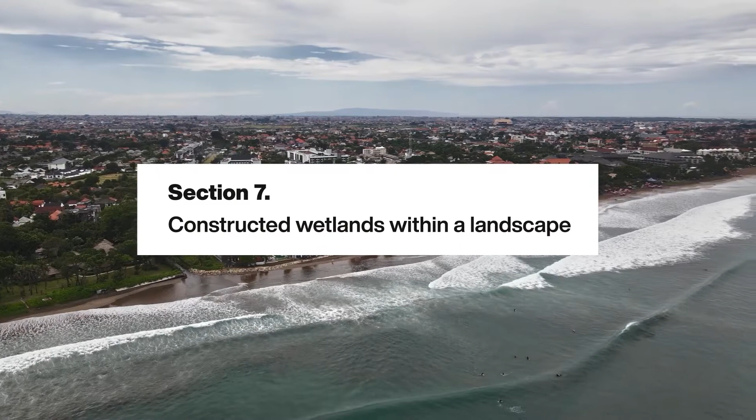So, where did we stop yesterday? Methods of wastewater collection. The first one is conventional, the second is a correct one. Well done, Betsy. That's the best way to say it. Thank you, Professor. Now please come out to the board and tell me what that means.

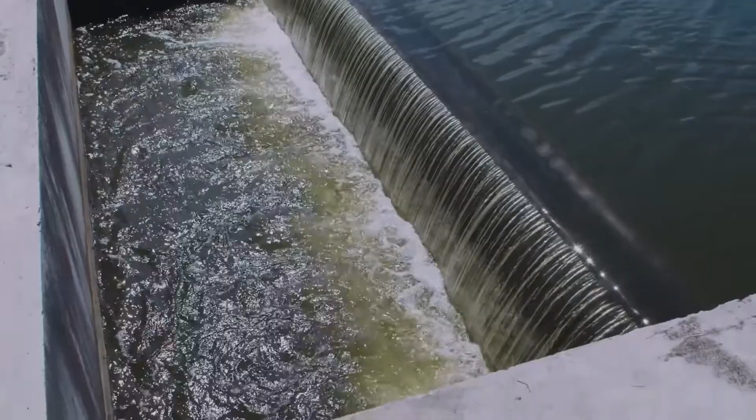With pleasure, Professor Higgins. The conventional method of wastewater collection dates back to ancient times, when wastewater was not cleaned or treated. Wastewater was just discharged and forgotten. This practice is still common today, where wastewater naturally flows downslope, ending up in the first body of water it runs into. It is interesting to note that today the types of wastewater, regardless of their principles of formation, are not the same as they were centuries ago.

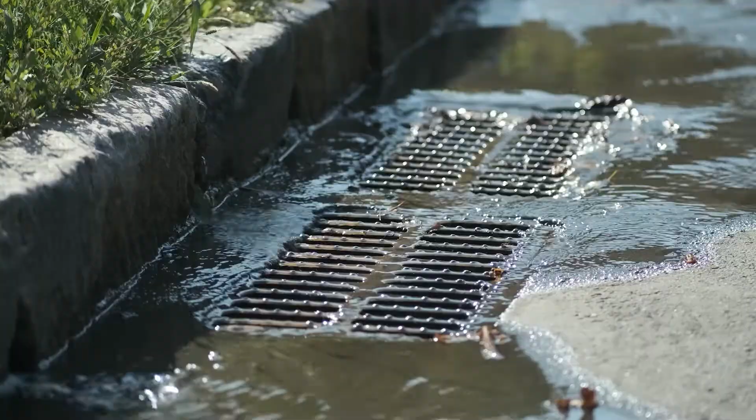Let's describe them. Domestic wastewaters carry everything related to human life: feces, urine, pharmaceuticals, detergents, and other household chemicals. Stormwater runoff resulting from precipitation that washes man-made pollutants off of roads, urban and industrial areas.

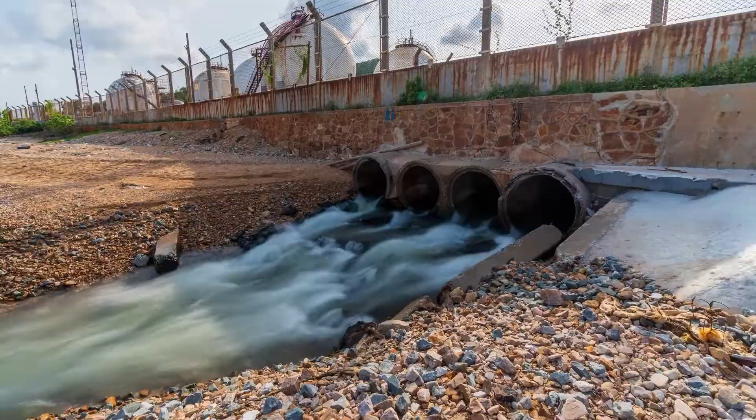There are two types of agricultural wastewaters: wastewater produced by plant cultivation and wastewater generated by livestock production. The first contain organic fertilizers, mineral fertilizers, and crop protection agents. The second contains waste from animal and poultry farms. And finally, industrial wastewaters, which are often the most toxic.

I'd like to reiterate that the conventional method of wastewater collection simply means that wastewater was not collected. Roughly speaking, various wastewaters simply flowed into random points of discharge and bodies of water. The second principle of wastewater collection includes three technological approaches.

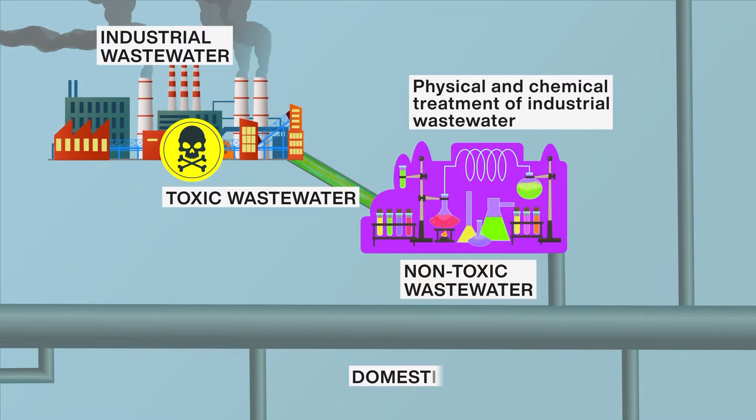The first approach: diffused runoffs are united into one water channel flowing into a particular treatment facility. The second approach: toxic runoffs are united into one channel going into a specialized treatment facility. The third approach deals with domestic wastewaters. Since they can be slightly polluted or heavily polluted, they require different types of constructed wetlands.

Slightly polluted domestic wastewaters are better treated by surface flow wetlands, and heavily polluted domestic wastewaters are treated by subsurface flow wetlands or hybrid wetlands. All of these methods help to collect wastewater suitable for biological treatment. Thank you, Betsy. You haven't missed anything.

Now, may I ask you to solve a problem? 500 tourists, including staff, are staying in a big oceanfront hotel. Every day, 600 cubic meters of the hotel's wastewater is released into the ocean. The hotel is served by a subsurface flow constructed wetland. The constructed wetland has the following parameters. Hydraulic retention time is 5 days. The porosity of the substrate is 50%.

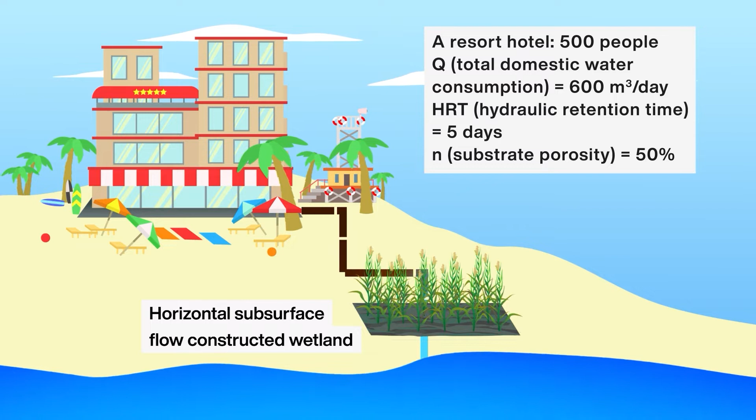I'd like you to calculate the working volume of this constructed wetland, necessary for more effective treatment of domestic wastewater that enter the ocean. Is the task clear? Yes, it is. I just need a few minutes.

The working volume of the constructed wetland is calculated using the following formula. Daily water flow rate is multiplied by hydraulic retention time and multiplied by 100%. The obtained product is divided by porosity, expressed as percentage. If I haven't made any mistakes, a volume of 6,000 cubic meters is required for effective treatment of this domestic wastewater.

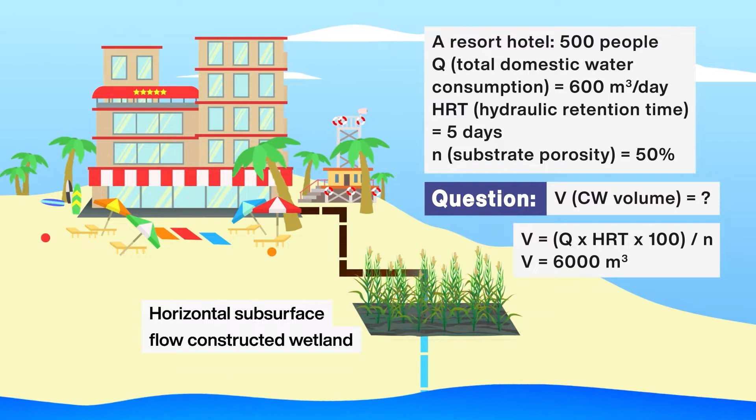Your calculations are correct, Ms. Doolittle. However, I set a trap that you have fallen into. If you have divided the overall water flow rate, 600 cubic meters per day, by the number of tourists, 500 people, you would obtain that each tourist spent about 1,200 liters per day. That is more than 4 times as much as the standard consumption rate in developed countries.

Thus, it's apparent for us that the influent is highly diluted. Maybe because of irrigation runoffs, or water from swimming pools, or both. Anyway, the optimal working volume of the wetland for this particular hotel compared to your calculations should be? It should be 4 times smaller than my result. That's not 6,000 cubic meters, but just about 1,500 cubic meters.

How stupid of me. You shouldn't criticize yourself, Miss Doolittle. Let's get into our subject.

Okay. Betsy, why did we choose this name for the subject? Constructed wetland within a landscape. What do we want to point out by choosing these words? Firstly, wetland construction and design is always part of a landscape. Secondly, constructed wetlands ensure a smooth transition from an artificial landscape to a natural one.

And thirdly, unlike activated sludge systems, constructed wetlands do not require a sanitary protection zone, which separates them from residential areas. That's not all. Autochthonous biocenosis of constructed wetland kills pathogenic microorganisms but doesn't harm beneficial microorganisms, which contribute to the treatment. Moreover, these beneficial microorganisms, together with the treated water, end up in natural bodies of water, where they continue cleaning. Thus, a constructed wetland is not only a piece of landscape, but also a part of the local ecosystem.

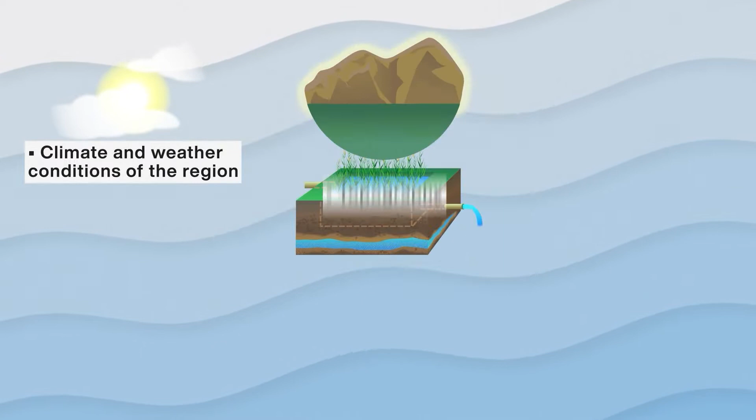To design a constructed wetland, technical engineers take the following factors into account: the climate and weather conditions of the region, the topography, the depth of the water table, the location of man-made objects nearby, the number of residents determining the wastewater volume, and the hydroecological characteristics of the receiving body of water.

Nowadays, there are many engineering solutions to each of the above-mentioned factors. Let me give some examples. Seasonal and weather factors involve, firstly, the planning of emergency spillways for excess water during heavy rainfall. Secondly, some protection to reduce evaporation from constructed wetland during dry season.

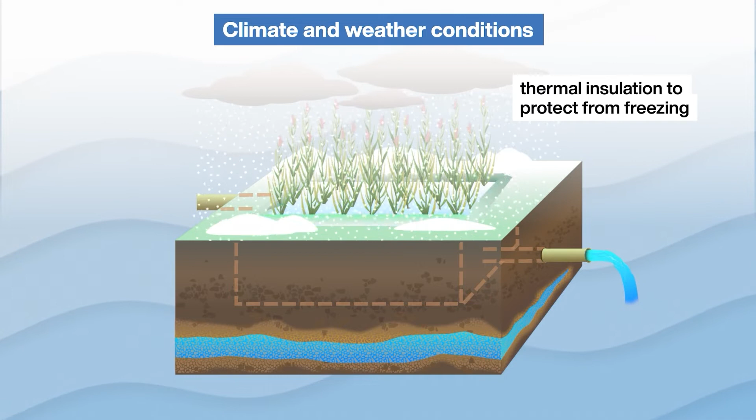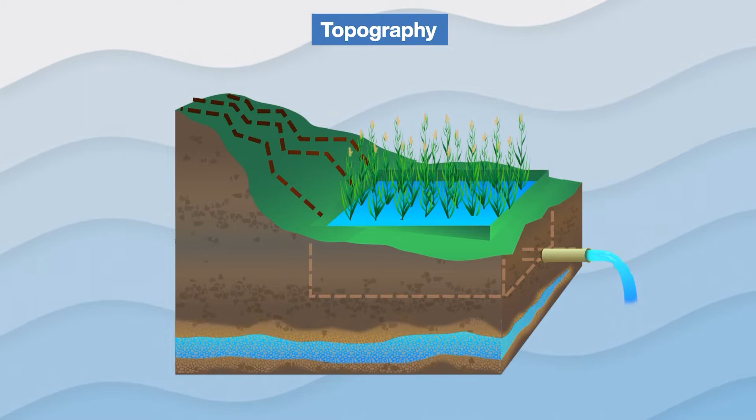And third, thermal insulation to protect the constructed wetland from freezing in case of a sudden drop in air temperature. The design of constructed wetlands requires considering the topography to ensure a downward flow for both influent and effluent in order to move water downhill. Betsy, why downhill? So as to avoid using pumps. Pumps would considerably increase the cost of constructed wetland operation and maintenance.

Exactly. The decision to build the constructed wetland below or above ground surface depends on the depth of the water table. If the water table is at sufficient, precisely calculated depth, the constructed wetland is built below ground surface. And vice versa, if ground waters are too high, a wetland should be located above the surface. Thank you, Ms. Doolittle. Man-made structures built into the landscape, like what structures, Betsy? Motorways or, for example, solid waste landfills.

Absolutely right. Stormwater runoff flowing down the motorways requires immediate treatment. That's why a very long wetland, often many kilometers long, is sometimes constructed on either side of a busy road. These constructed wetlands effectively treat stormwater runoff to prevent pollution of the nearby landscape. Solid waste landfills are exposed to heavy rainfall. In this case, a constructed wetland surface should be located below the waterproof bottom lining of the landfill.

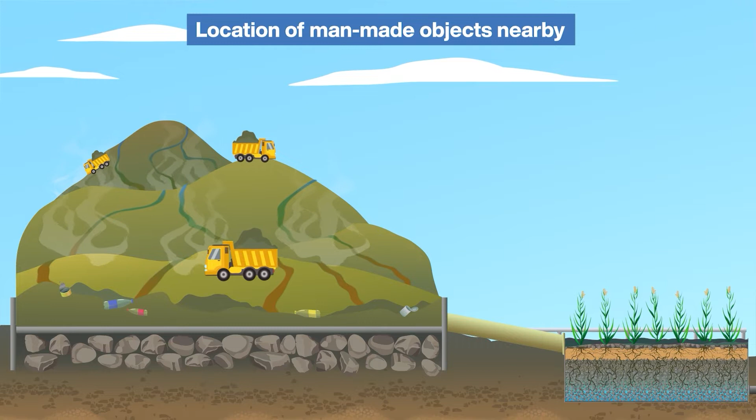Betsy, why do we need a waterproof bottom lining? And why does a wetland surface have to be below it? When rainwater percolates the layers of waste, the outflow is a toxic mixture. A waterproof bottom lining is crucial to prevent the infiltration of this toxic mixture into groundwater. And if the wetland is placed below the surface of the waterproof bottom lining, the landfill runoffs inevitably get into the wetland. Okay, let's carry on.

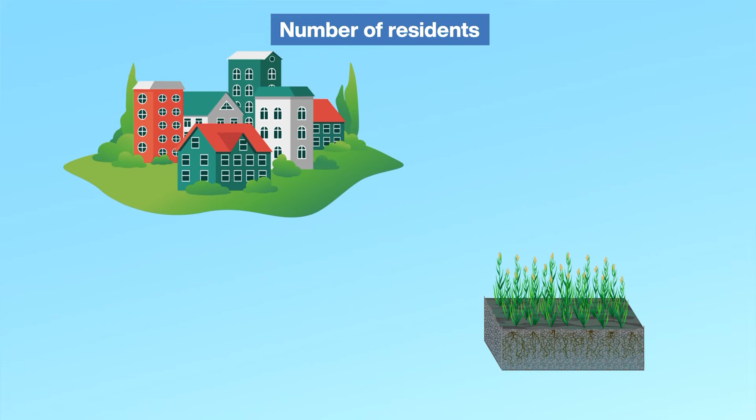The volume of domestic wastewater in this area depends on the number of its residents. And, as we have already discussed, this determines the working volume of the constructed wetlands suitable for this landscape. And then, lastly, self-purification of the receiving bodies of water, lakes, ponds, rivers, takes a short time only if we, wastewater treatment specialists, strictly follow certain hydrological, hydrochemical, and hydrobiological conditions. Project engineers consider most of these conditions when constructing the wetland.

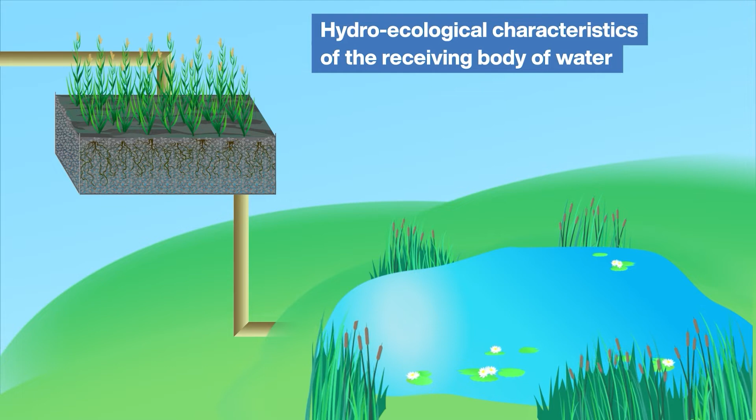Ms. Doolittle, thank you once again for your clear-cut answers and comments. I have no more questions. Professor, but may I ask you a question? Of course. Sir, could you give some examples of when effluents increase the biodiversity of a receiving body of water and improve its hydrological parameters at the same time?

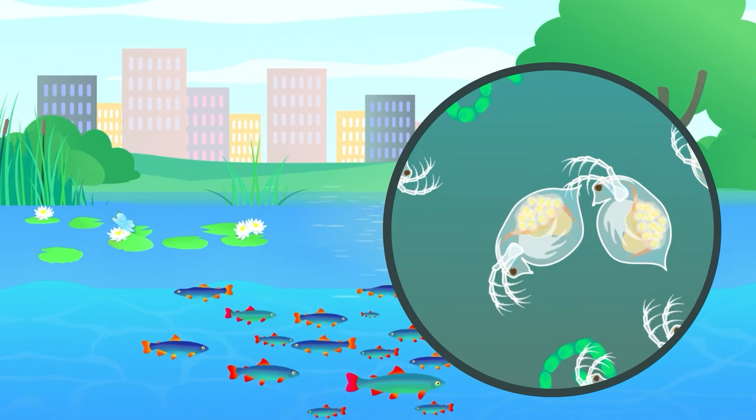There are many such examples, but now I will give you only one. The building of two integrated constructed wetlands at Xinhai and Daniaopi in Taiwan allowed for a considerable increase in biodiversity in the area. The number of bird, fish, and aquatic invertebrate species increased more than twofold. The landscape around these wetlands is now difficult to distinguish from a natural one. That's amazing. I agree. What's also amazing is how different constructed wetlands are from activated sludge systems.

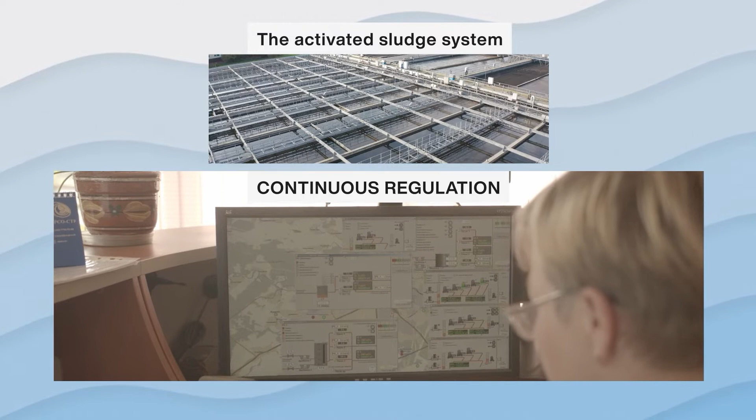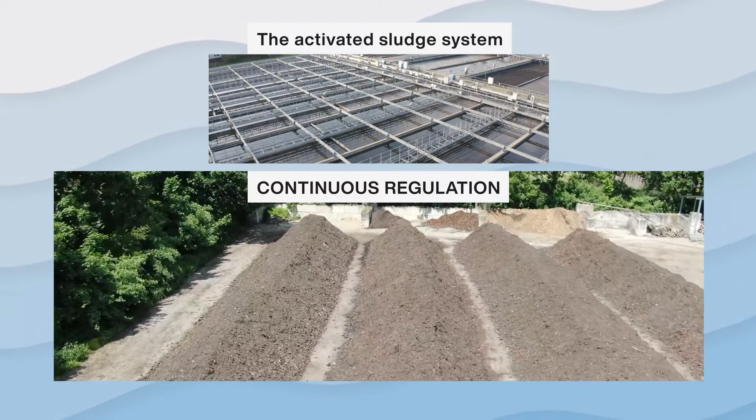I will reiterate that the cement facilities of an activated sludge system also need continuous monitoring. 24 hours a day, operators regulate the processes in the aeration tanks. Engineers must constantly monitor the air blowers and mixers. Special technical services continuously oversee the recycling of the excess activated sludge, etc., etc. A constructed wetland, by contrast, is self-regulated. It's amazing how a constructed wetland is in itself a small ecosystem, which incorporates into the ecosystem of a particular area and supports its homeostasis.

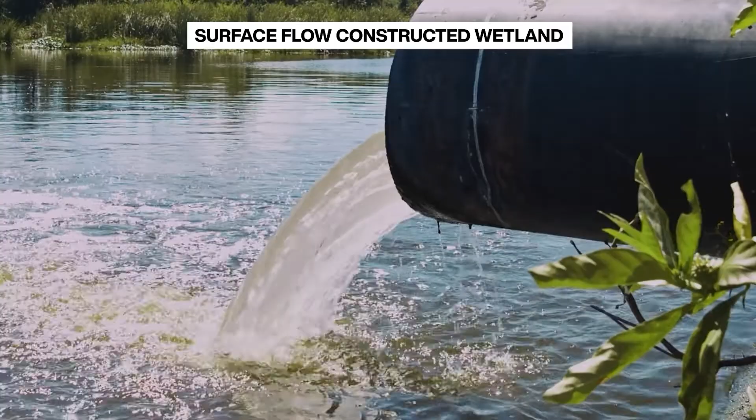For example, by discharging into a pond or lake, a constructed wetland can considerably contribute to plankton growth, which creates perfect conditions for populating the water body with fish. In addition, a carefully landscaped wetland is a comfortable habitat for aquatic and terrestrial animals, as well as many bird species, including migratory ones. On top of that, treated effluents can provide fast-growing trees with nutrients, as they consume far more nutrients than ordinary trees. All in all, it's hard to exaggerate the benefits of a constructed wetland as a treatment facility.

What's also important for us as wastewater treatment specialists is that constructed wetlands are usually very beautiful. They are visually attractive and make you feel as if you are walking in a park. That's true. Miss Doolittle, speaking of which, let's compare two quantitative indicators. A farmland of 1,800 square meters is required to feed one human resident of our planet on a daily basis, according to the Food and Agriculture Organization of the United Nations. This is the first indicator.

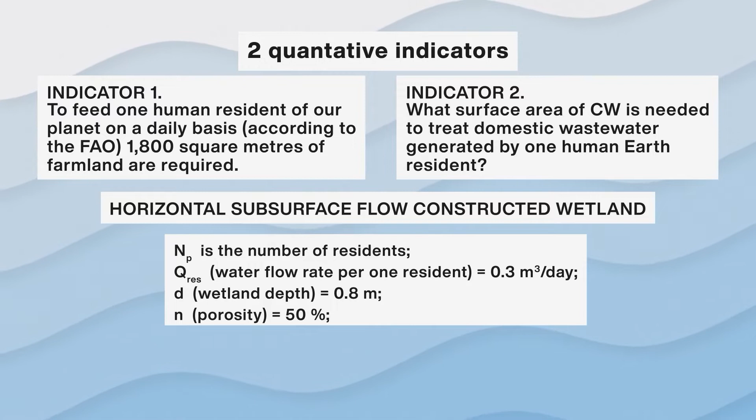The second indicator is for you to calculate what surface area of constructed wetland is needed to treat domestic wastewater generated by one Earth resident. Using which type of constructed wetland? A horizontal subsurface flow constructed wetland. Could you please write the following on the board? The number of residents whose domestic wastewater enters the constructed wetland equals Np. Water flow rate per one resident is 0.3 cubic meters per day. The constructed wetland's depth is 0.8 meters. Substrate porosity is 50%. Hydraulic retention time is 7 days.

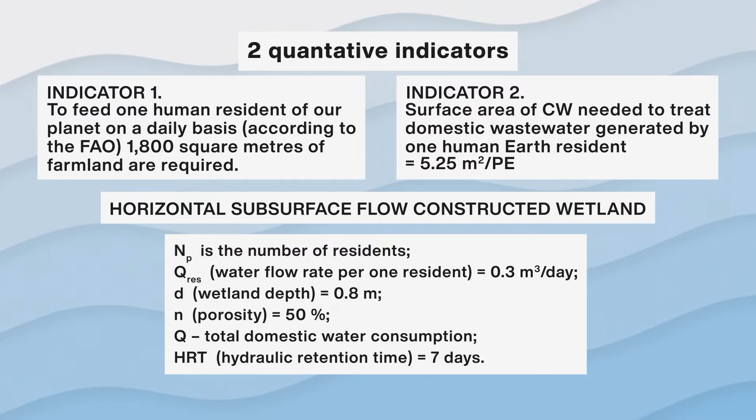Please calculate the surface area of the constructed wetland which can treat domestic wastewater produced by one person. Is the task clear? Yes, one moment, I'm making calculations. I have the answer. It's 5.25 square meters. I've never given much thought to how much more difficult it is to feed a human rather than to treat their personal domestic waste. Yes, but only if it deals with domestic wastewater, putting aside industrial and other types of pollutants.

Now I think it's time to discuss the most important feature of treatment wetlands. Please write on the board technical and natural components in wetlands construction. Professor, here we have to consider how important the work is that's done by engineers and the contribution of biologists in wetland construction. What's the role of engineers? Yes, it's an interesting topic. Engineers calculate a wetland's volume, choose the appropriate materials, and build the skeleton of a wetland.

Excellent, Miss Doolittle. Let's do this. You'll tell me everything, but tomorrow. We'll discuss it tomorrow. For now, I have to run. See you.

Involves hydro insulation and thermal insulation if necessary.